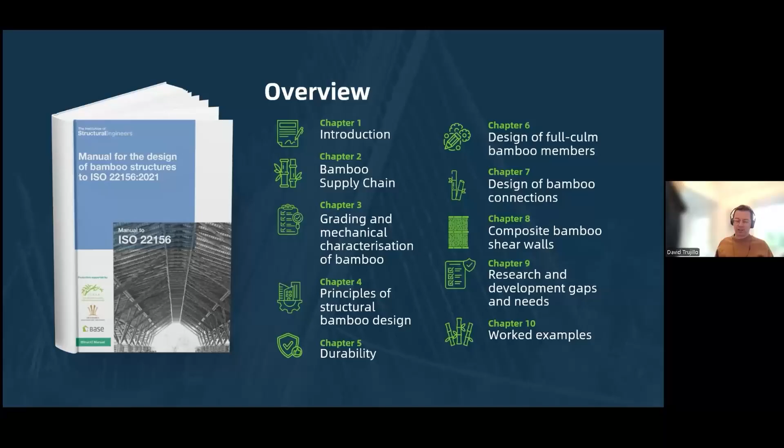And also for the academics, for example, in the room, pointing to things that we need to know more about. And finally, something that's of course essential is to point out to people how you go about designing things. The book contains detailed explanations. We try to make things very clear, so we've used tables, flowcharts and graphs to make concepts as clear as possible.

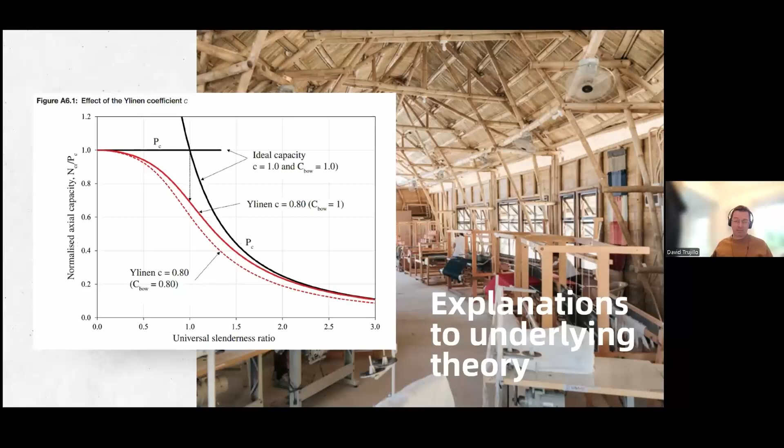We also explain the theory behind some of the things contained, not just in the manual, but in ISO 22156, because the authors were also part of the team of people who put together ISO 22156. So we know what was behind the thinking, and that's the advantage of the manual. It explains the how and the why. It contains useful guidance, and in this instance, about how to ensure that your buildings are durable.

It's one of the things I will hopefully discuss later on, because this manual is not just a...

Whoa, what happened there? We can hear you, David. It's okay. Can you see my presentation? Yeah.

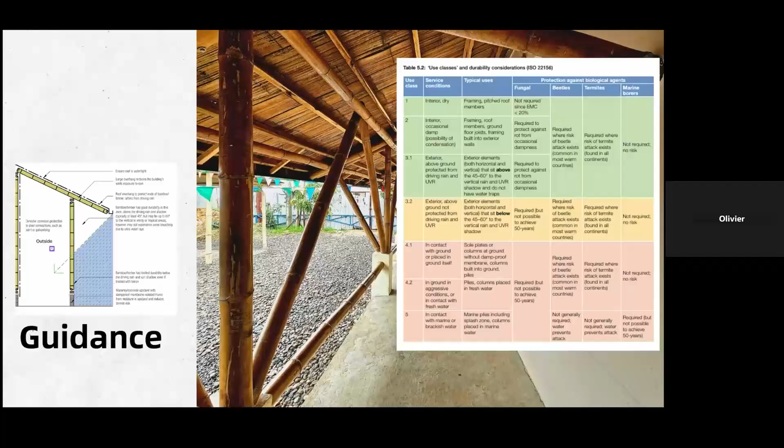It's probably the first document that contains such detailed information about durability of bamboo, how to ensure durability. It's also probably the first that contains so much information about designing composite bamboo shear walls, or bareque, for Latin Americans in the room. It's got lots of illustrations that explain how things work, and a lot of text that clarifies things. And of course, it contains worked examples, which take people through how you use both the manual and the standard.

So that's sort of the basics of what the manual now introduces. Oh, my camera's gone funny.

Yeah, I think you are blurred now. I'm blurred, I don't know. It didn't like me any longer.

I would like to start by saying that the book, though it's aimed at structural engineers, and to a certain extent it's the first of its kind aimed at structural engineers, it's also useful to architects and other professionals for other reasons. For example, it's useful to architects in chapter 4, which outlines the concept of how you design, and how to ensure design is appropriate to bamboo. And chapter 5, which talks about durability, is also very much in the realm of architects. But it also talks to other building professionals about what we engineers are after. So though it's aimed at structural engineers, it helps many people.

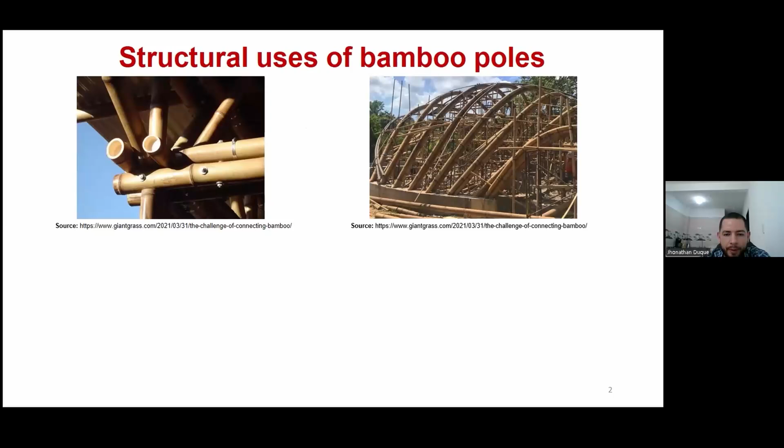First, I would like to begin by saying that bamboo is a material for everyone. Thanks to its versatility, bamboo can be used in straight column form to build large and complex structures, and also bamboo can be bent to create roof systems with great architectural beauty.

But this material can also be used to develop relatively simple structures that can represent a social solution for low income communities. Another important application, especially for people in developing countries, is housing. For example, in Colombia, the housing deficit is close to 30%. So social housing projects using bamboo can improve the quality of life of many people, many families.

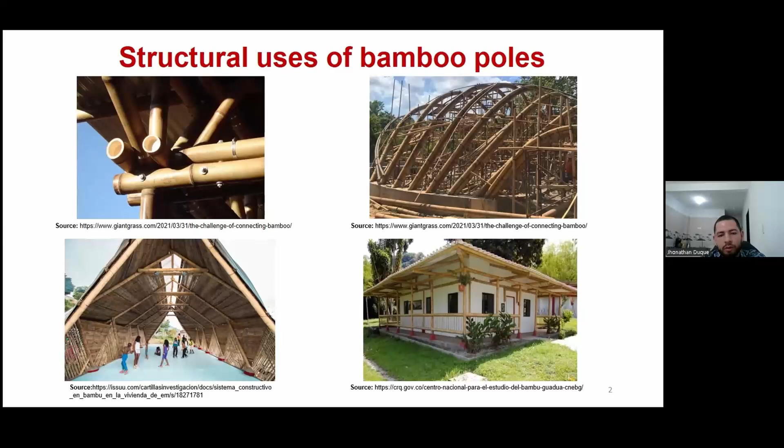The evolution of Bareque construction into the cement bamboo frame technology system has led to a structurally predictable and standardized construction method, which is now being used in projects with high social impact, for example, in the Philippines and neighboring countries.

These systems mainly use bamboo poles for the vertical studs in the walls or for roof structures, but these bamboo poles do not provide an optimal surface to execute some types of connections between elements. For example, if you want to incorporate flat wooden or fiber cement boards to complete the wall sandwich, it can be complicated with poles.

In fact, for roof structures, it's often necessary to use small wooden blocks to level the surface before installing the roof tiles. For wall construction, this challenge is addressed using crushed bamboo mats, or esterilla, and flexible metal mesh, which can adapt to the irregular surface, but this requires significant labor.

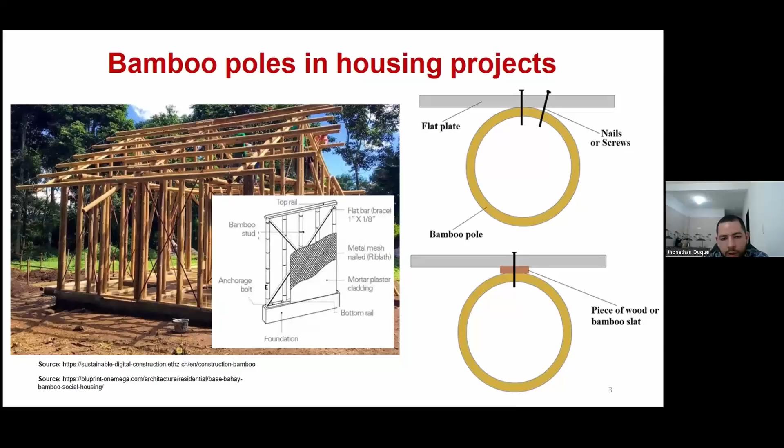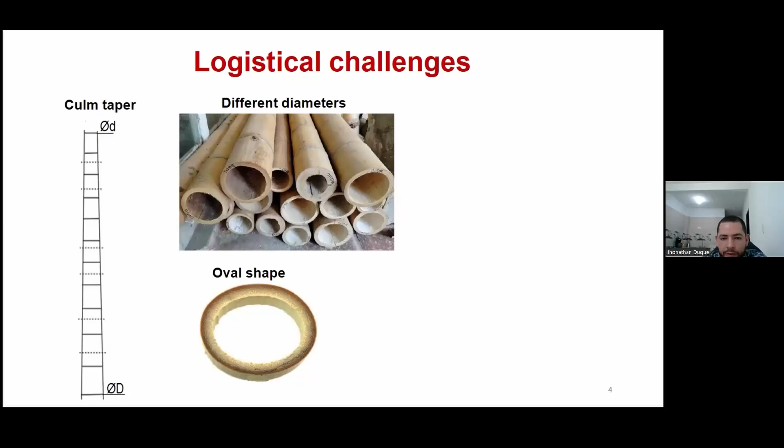All of this is due to bamboo's natural geometric irregularities, as bamboo poles can be conical, have varying diameters, or be quite oval shaped, all of which can complicate many kinds of connections. In addition, poles are prone to cracking and to volumetric changes that generate circumferential stresses and eventually longitudinal splits. All these factors often lead to a high amount of material waste.

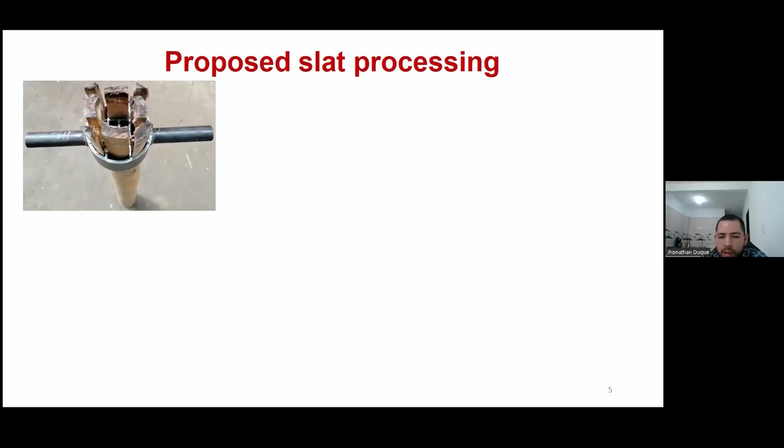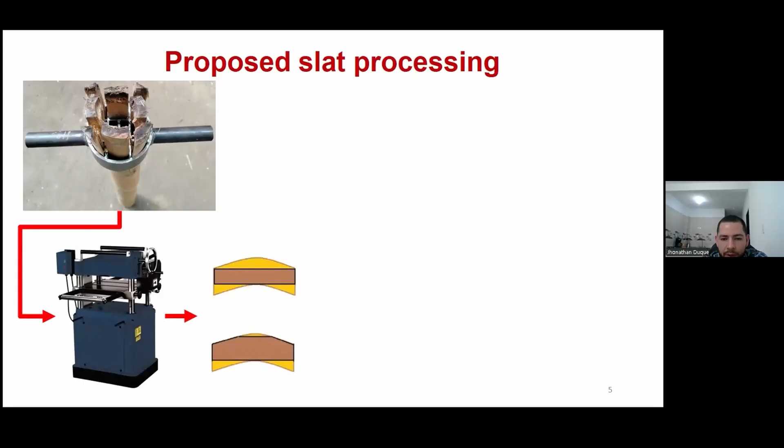For this reason, we are proposing extracting slats by longitudinal cutting of bamboo poles. This can be done manually or with simple machines, and then these slats are planed, taking care not to completely remove the outer surface, because we think this layer has the best mechanical properties.

So with this processing, the inner curvature is fully removed, and on the outside we mainly remove the protrusions near the natural nodes. This allows us to stack multiple slats together and create flatter surfaces that can facilitate the connections.

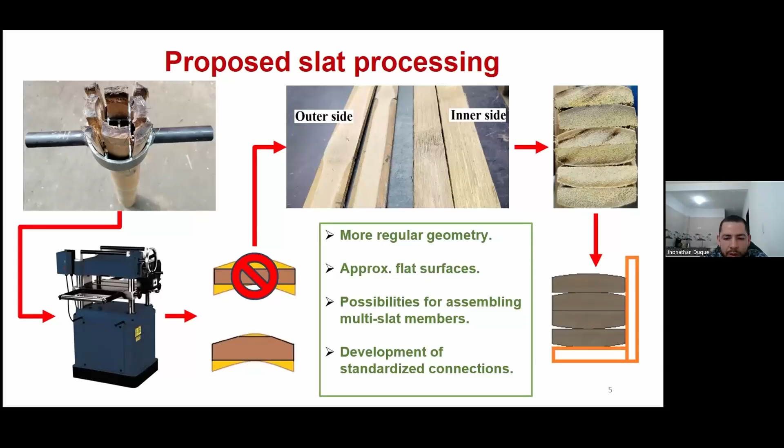Some advantages of this processing include more regular geometries, flatter connection surfaces, the possibility of assembling multi-slat members, and the development of connections with standardized dimensions.

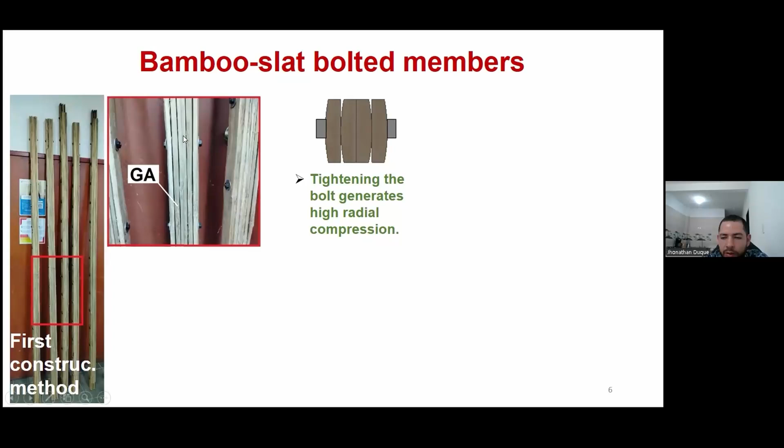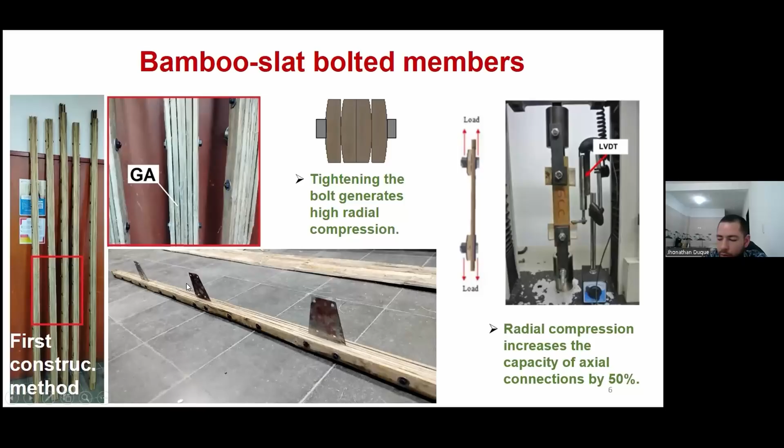With these configurations, we propose multi-slat members joined with quarter inch bolts that can be tightened strongly, generating a high radial compression through the slats. Some research has shown that this radial compression can increase the capacity of axial connections by 50%. In addition, this configuration allows thin steel gusset plates to be installed, which can connect multiple members in different directions, for example. So this can be a good idea.

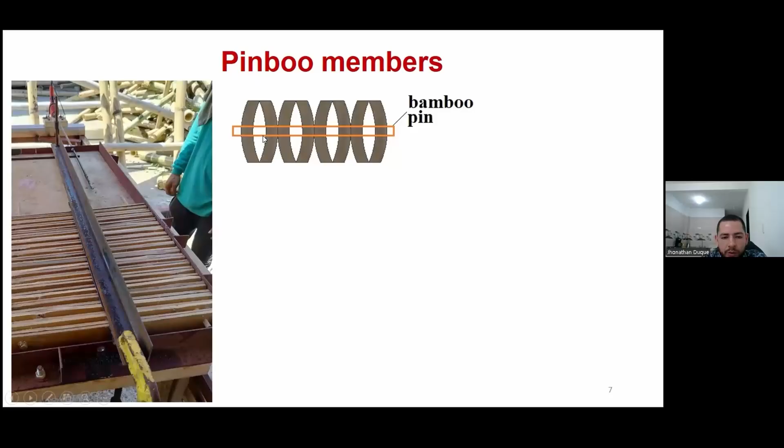Another alternative to connect slats is to join natural, unplaned slats, keeping their natural curvature. The point here is to try to reduce the labor. This can be achieved using bamboo pins to form what we call Pinboo elements, and with support from Base Bahay, we built a drilling and assembly table and a simple machine to produce pins.

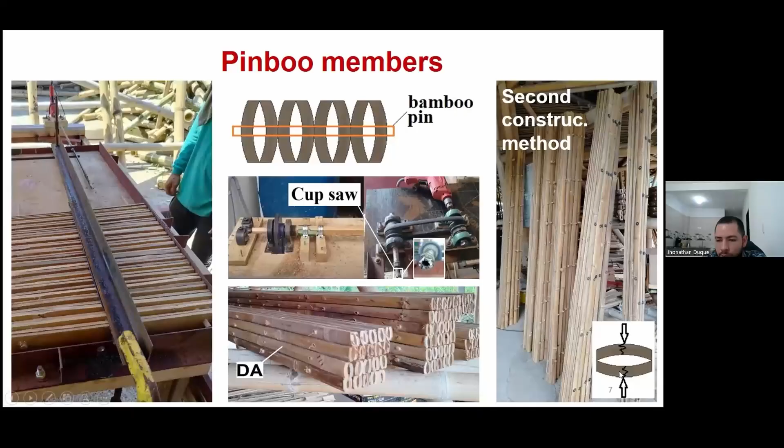Using this equipment, we built both Pinboo specimens and bolt connected specimens. Here, the bolts must be installed without preload to avoid cracking through the slats due to possible bending stresses.

We performed compression tests on these specimens to have a first characterization. Here in Colombia, we tested 1 meter members built with the first constructive method, that is, planed Guadua slats with pre-stress or preload of the bolts. In the Philippines, we tested 2.4 meter members built with the second construction method, that is, unplaned Dendrocalamus asper slats, connected with bamboo pins, and with non-preloaded bolts.

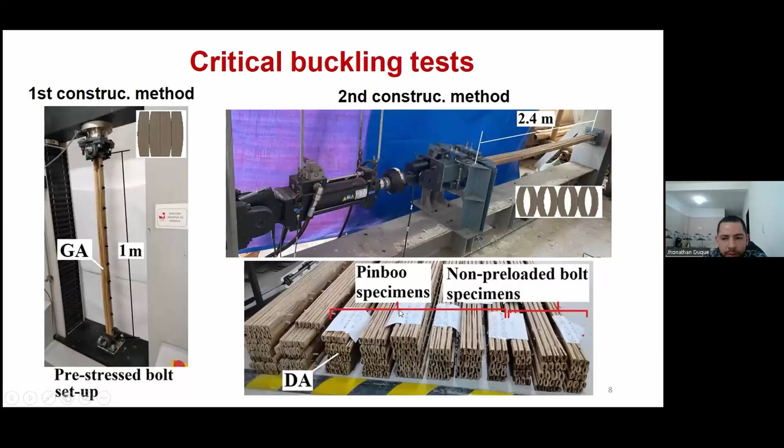We are analyzing the results through different approaches. One of these, we use a parameter that we call index ratio, which is the ratio between the effective moment of inertia to the geometric moment of inertia, where the effective inertia is obtained by rearranging or solving Euler's equation and using the critical load, the experimental load that we found from the curves.

In this graph, we see that the first construction method, these blue columns, achieve an index ratio greater than 0.8, so it's near to the optimal index ratio, that's 1. This represents a strong composite action of these elements.

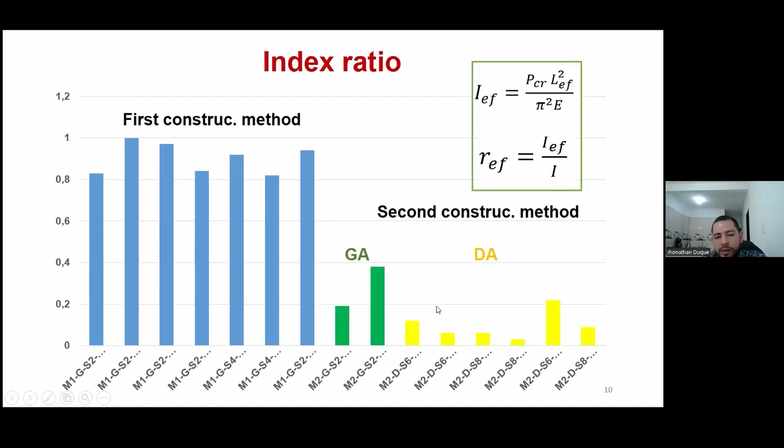In contrast, the second method shows a more limited composite action. These green columns represent some validation groups that we built with Guadua slats, but using the second constructive method, to ensure that differences were not due to bamboo species.

A second approach used some European equations to determine the imperfection factor that best fit the experimental results. Here, a factor of 0.39 provided a good fit for the first construction method, that is this orange curve.

But for the second method, this approach was not valid because the results were too small, we can say that.

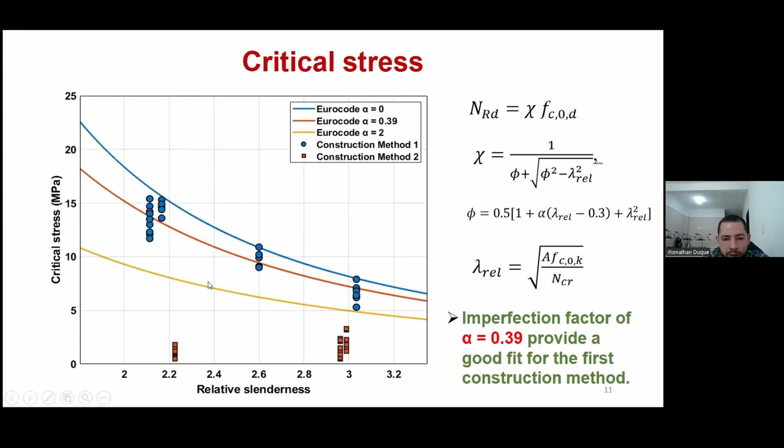We also use finite element models to compare experimental and analytical results from the index ratio approach, and we found good agreement with the numerical result, as you can see here. It's really near.

So then we explore different joint configurations for slat members. We first propose the connection between 2 slats using thin steel clamps and a couple of 1/4-inch bolts, and also we propose multi-slat connections using bamboo pins.

First, in this proposal, we try to do a kind of finger joint or finger configuration with these slats. So we complete the joint with bamboo pins, with wooden blocks, with a thin metal sheet and some screws.

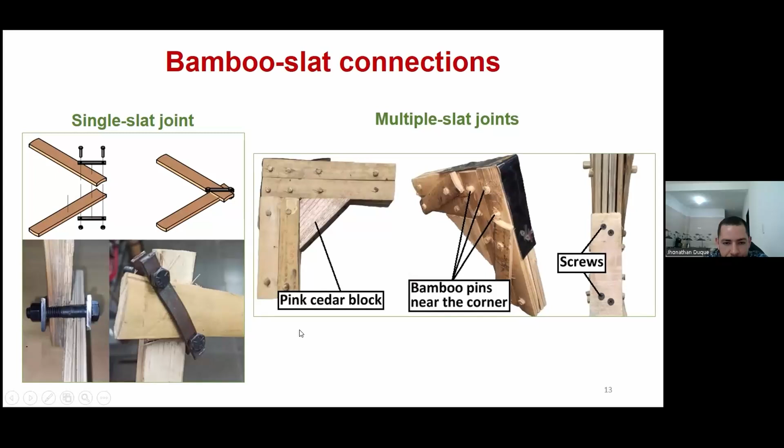And we do a first characterization under monotonic loading of this kind of connection. For example, for the 2-slat connection, we obtain a maximum moment of 0.19 kilonewton meter and a rotational stiffness of 3.8 kilonewton meter per radian, and ductility of 17.5.

That was really high. For the multi-slat connection, the maximum moment and stiffness increased by 7 and 1.8 times respectively compared with the 2-slat connection, while the ductility decreased by about 7 times, because the holes near the connection zone can generate stress concentration, becoming more brittle the joints.

We then propose a simpler and easier to assemble connection consisting of 2 multi-slat members joined with a finger configuration, as you can see here, and that is confined with 2 millimeter thick steel gusset plates, tightened with 5/16-inch bolts.

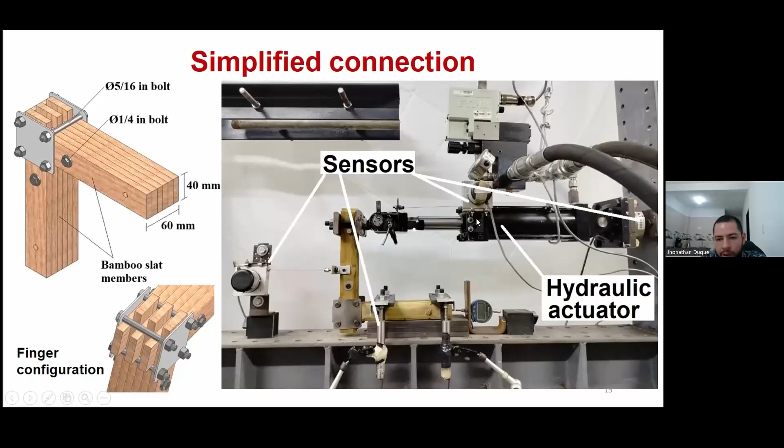Based on this monotonic experimental results, we developed a 3-linear analytical model that uses the slat dimension and mechanical property to predict the monotonic behavior, represented by these blue and green curves.

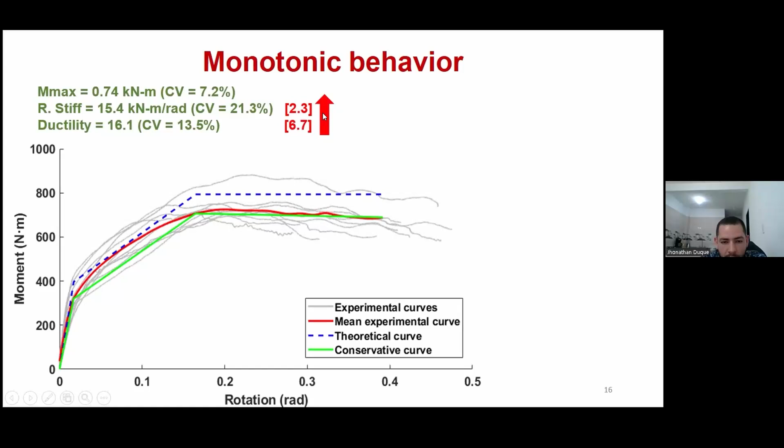We found significant improvement in rotational stiffness, 2.3 times, and in ductility, 6.7 times higher compared with the multi-slat connection with bamboo pins. And using the beamline methodology that is usually used for moment connections, we could classify this joint as partially restrained.

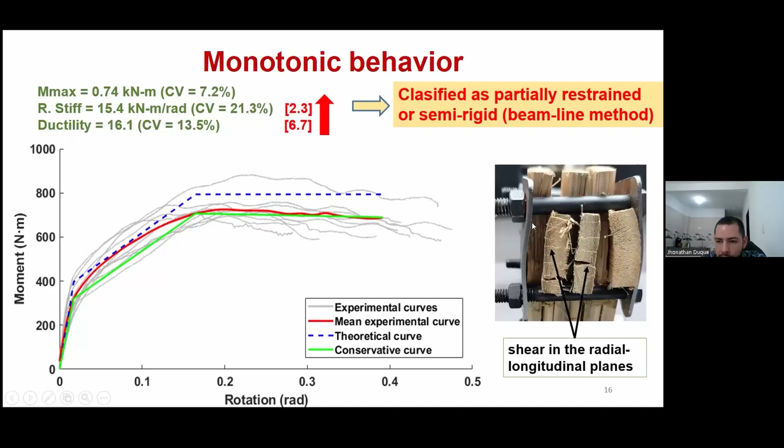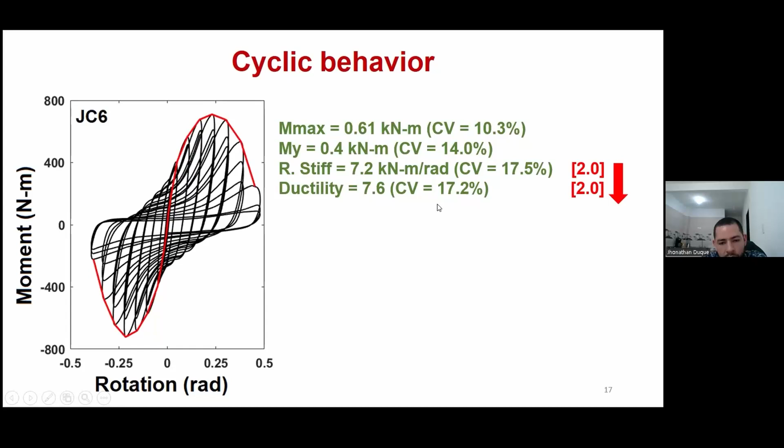Here's one of the cycle curves with 30 cycles. The red line shows the backbone curve from which these performance parameters were extracted. It's important to know that rotational stiffness and ductility in the cyclic test were about half of those found in the monotonic test. This may be due to loss of friction and small relative movement that can be caused by load reversals.

In several specimens, we obtain the complete or total fracture of the slats passing through the finger joint zone, mainly due to the longitudinal tension from the bending that is supported by these slat members.

The goal of all this is to be able to build this kind of frames or skeleton using these multi-slat members in the vertical stud and horizontal joist, and these elements will be connected with moment resistant joints. So the connection I was showing now will be used at the frame corners.

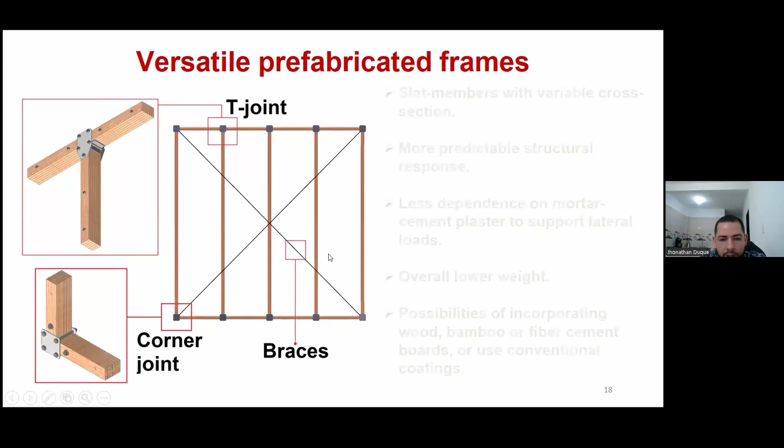So we also need to develop the joints for intermediate nodes, and we plan to test different kinds of bracing configurations and different cladding or coatings for this frame. So in this proposal, the frame thickness can vary depending on the number of slats per member.

We think the structural behavior could be highly predictable, and the system could rely less on cement mortar plasters to resist lateral loads, making it lighter. In addition, there's a potential to incorporate wood, bamboo, or fiber cement boards, or to use conventional cement plaster.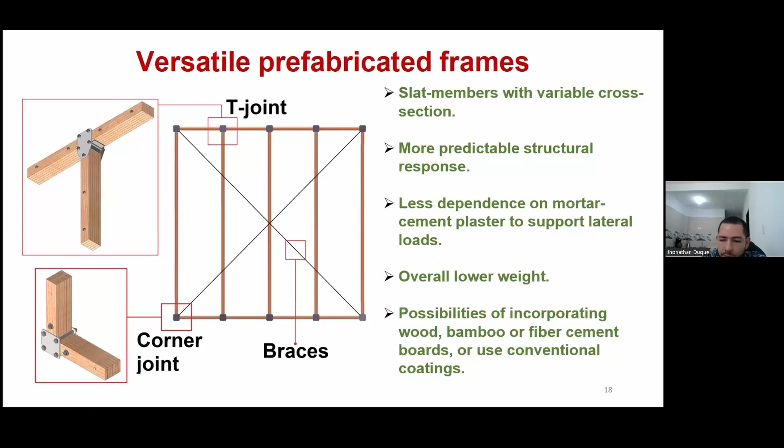Okay, regarding the T-joints, we have made some progress. In the first phase, we propose several configurations.

Here I'm presenting three. In the first proposal, the horizontal members are connected to the stud vertical member on both sides using 1/8-inch thick steel brackets with 1/4-inch bolts.

In the second proposal, the vertical stud rests on top of the horizontal member, and that is confined by using a couple of gusset plates that are tightened with bolts.

For the third proposal, we use a gusset plate that is installed in the middle plane of the slats of both horizontal and vertical member.

In this case, the gusset is connected to the horizontal member with bolts, so we have to drill holes on the slats here, and it's connected to the column elements by using a couple of clamps without drilling into the slats.

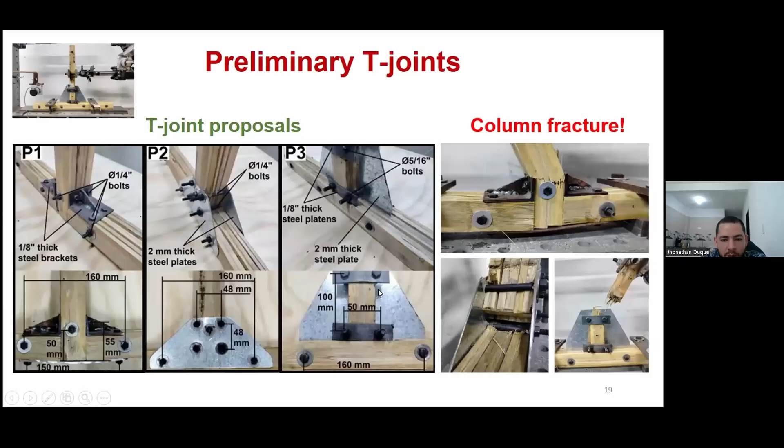So we conducted a second phase of experiments with geometric modification to this design. We changed the aspect ratio of these plates. This distance was 160 millimeters, and it was reduced to 120 millimeters.

And we tested here three plate thicknesses: 0.8 millimeters, 1.5 millimeters, and 2 millimeters.

Okay, for the thinner plates, failures occur in the connection steel elements, while the bamboo remains intact. For example, at 0.8 millimeters, the failure mode was local buckling and shear tearing due to the bolt interaction here.

At 1.5 millimeters, we observe only shear tearing due to the bolt interaction.

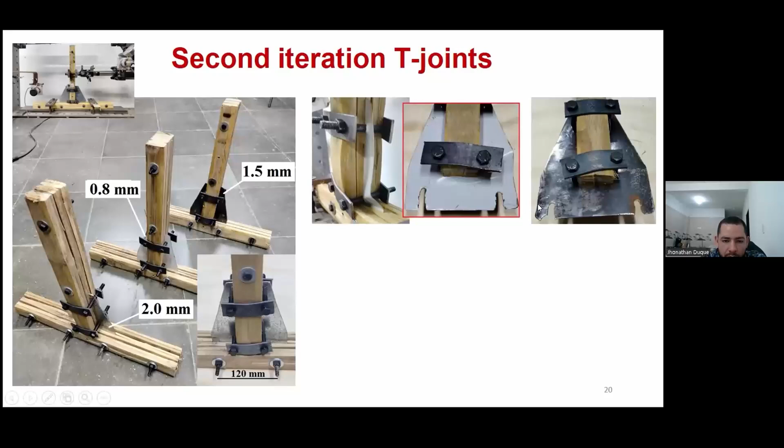And finally, for the 2 millimeter thickness, we observe a good failure. You can say that the horizontal bamboo member failed, and some steel elements were plastically deformed, and I say that was a good failure mode because it was a ductile failure, so we estimate a ductility of 4.3.

That is a good ductility, and based on these results, we select this connection for full monotonic and cyclic characterization, and that will be the next stage.

Okay, so these are some preliminary conclusions, but before that, I would like to show you this first frame or skeleton that I'm finishing. The idea with this specimen is to test under monotonic or cyclic protocols, first without bracing, to test the work of the moment resistant joints that we are using here.

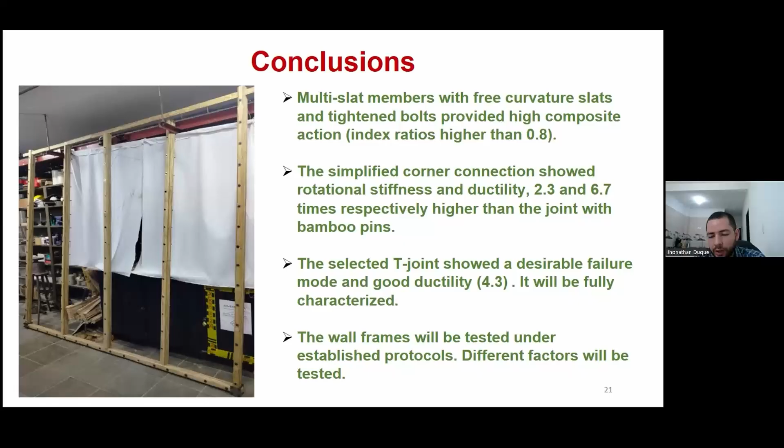And the wall frames will be tested under established protocols with different factors that I mentioned.

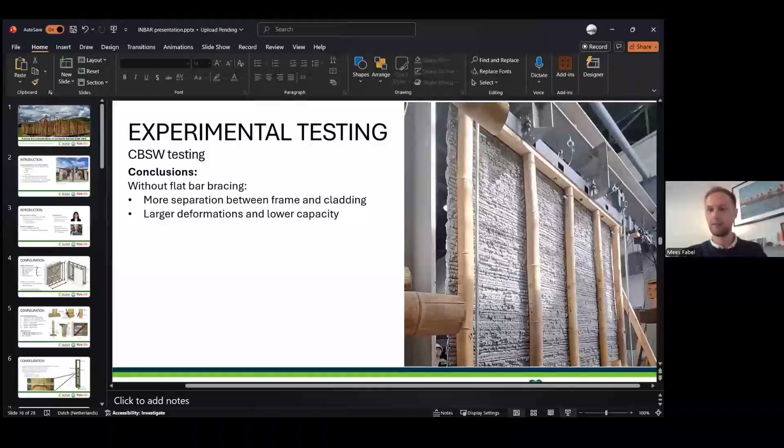So how are you, Mees? Nice to see you. Yeah, nice to see you as well, Luis. It's been a long time. First of all, thank you for the opportunity to share the work that we've been doing. Thank you also, Jhonathan, for the nice presentation. I will go and share my presentation. Let's see. All right, I think we go here. Is it visible? Yeah, but not just there. Okay, now it's perfect.

All right, great. So good evening everyone in the Philippines, and good day to the rest of the world, I guess. I'm going to share the work that I've been doing at Base Bahay, which focuses on composite bamboo shear walls, which are also included in the new book. Yeah, great to see.

First, I'll tell you something about Base. Base Bahay is a company that researches the use of bamboo structures, and one of their main systems applied in housing is composite bamboo shear walls. They apply it in projects in the Philippines, but also Nepal, India, and Sri Lanka. In the Philippines, they're using a local species called Bambusa blumeana, or Kawayan tinik in Tagalog. The nice thing about this type of structure is that it has a good ductility ratio, so it's very good for use in seismic areas.

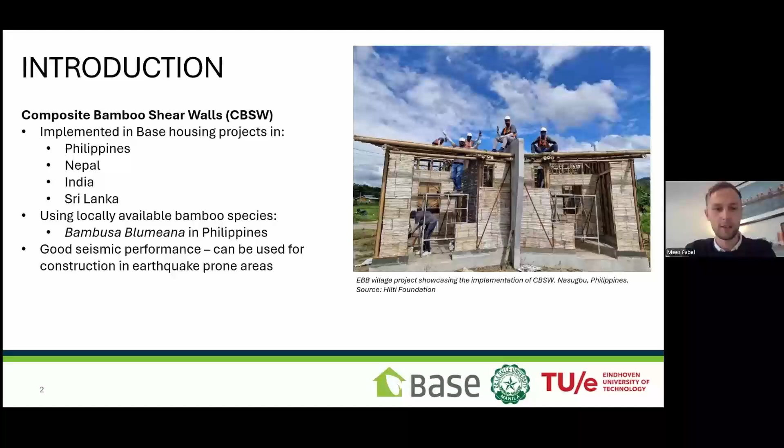So let's dive into it. First, I will explain a little bit what is the layout of a composite bamboo shear wall. As you can see, it's consisting of a frame and a cladding, and the frame and the cladding are connected by fasteners. So those three elements are basically what make up the shear wall.

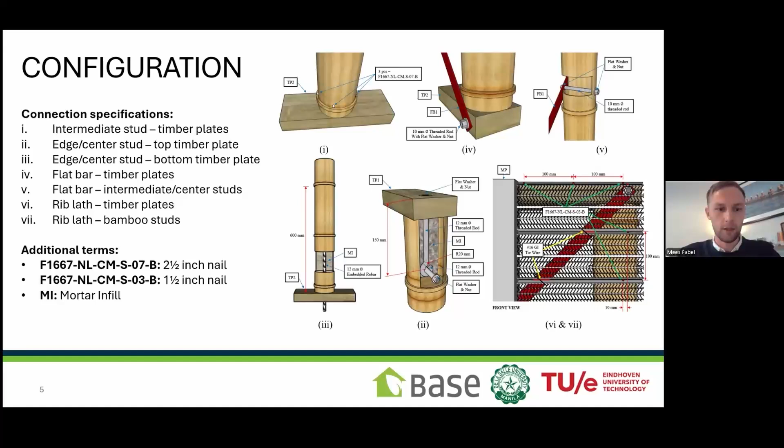For the connections, this is a bit of an overview for the nailed connections, which are a big aspect of this wall system. What you can see here is a section of one bamboo stud, and for the connection with the cladding, the nails are actually placed through the wall of the bamboo culm. Because of that, you get a different interaction for places where mortar infill is applied or where there is no mortar infill applied. This is a very important point for the capacity of the total shear wall, which we will get to in a bit.

Also, you can see here again that for a proper connection, we use bamboo that has nodes very close to the edge. Then if we consider all the fasteners, so the nails and the bolts, when bracing is applied, we can schematically lay them out like this, so that you get an overview of what type of embedment or what type of connection you have in which position on the frame.

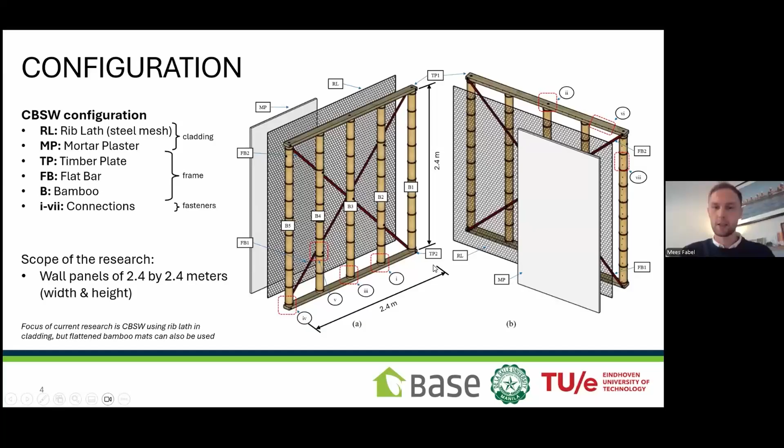So I will just quickly go back to this slide. For the figure that I just showed you, the frame is actually the same shape as the layout, and that's because the fasteners are positioned along this frame. What's interesting to see here is that there's mortar infill applied at the edge studs at the top and at the bottom, and you have some bolts which are along the flat bar bracing.

So with these fastener types, we have a very good representation of our frame, of our connections. And then we can use this to, for example, model the shear wall.

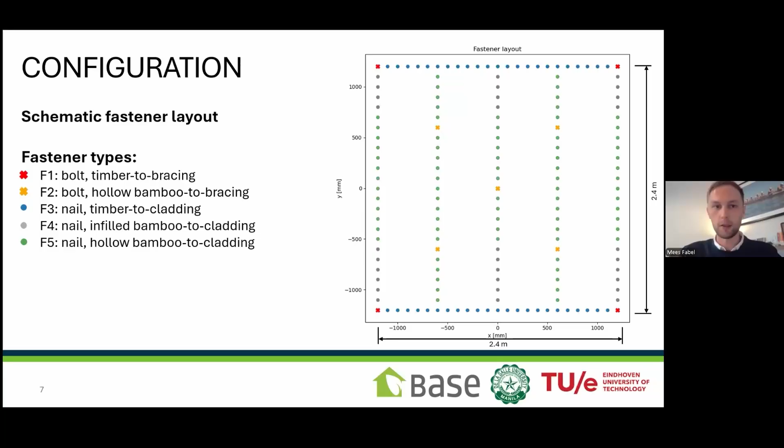But first, I want to show you the testing that we did. Here is an overview of all the testing. We wanted to be able to make a prediction of how the shear wall behaves under loading.

For that, it's necessary to look at the single connections used in the shear wall. So we did some partial testing: single fastener tests. And then after that, we also did some full shear wall testing.

We tested only the bamboo connections because for the timber connections, we assume to be able to use the Eurocode, since it's already quite well documented.

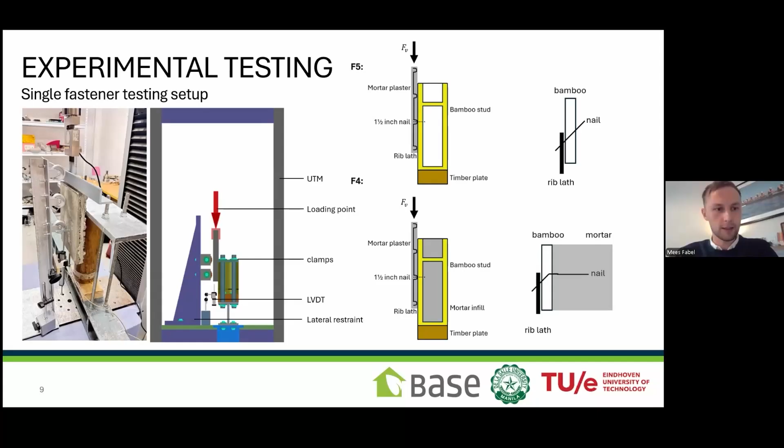Something that happened in all of the testing: after a certain displacement, the rib lath also loses its capacity. It basically ruptures, and then there's a total separation between the cladding and the frame. These failure modes are very interesting to take with us to the actual full-scale testing.

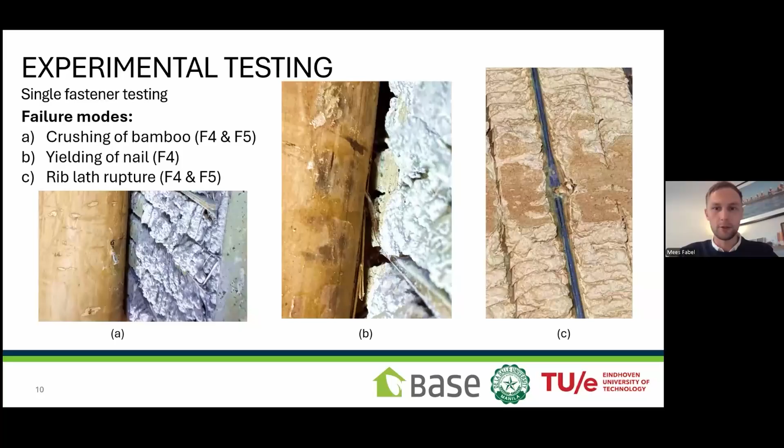Here are the same conclusions listed again. So with this knowledge, we can move on to the full-scale testing.

And that's where the single fasteners come in, because shear failure is then only caused by the connection between the frame and the cladding, which is the fasteners.

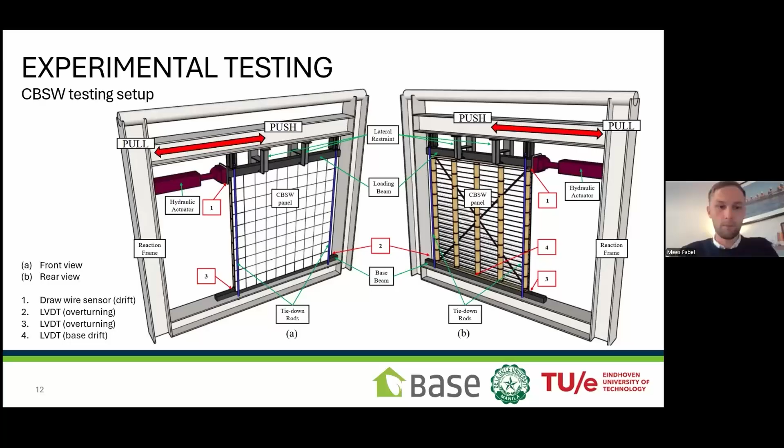We actually used the data from the monotonic test, using the failure displacement to cater the cyclic testing. So for cyclic testing, you control the displacement and increase it until this failure displacement retrieved from monotonic testing.

So with this, we started testing. I wanted to share with you some of the videos that we have. First, I'll show a monotonic test, and then after that, I will show the cyclic test.

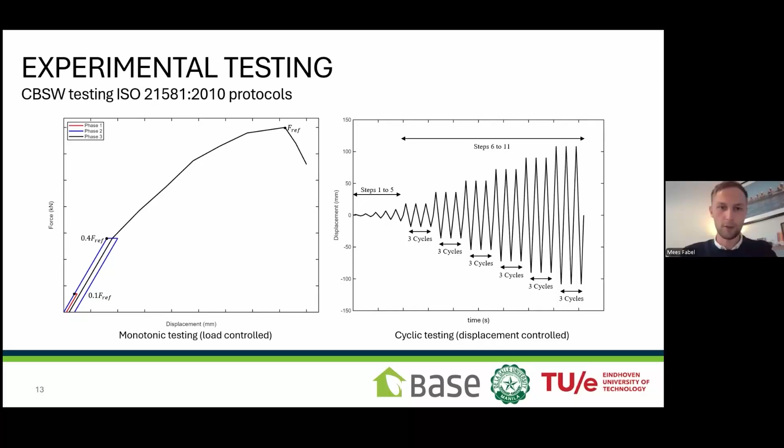For the cyclic test, we did them at a very high pace, so it's also very nice to hear the sounds that come along with it. I hope you can hear it from the presentation. First, here's the monotonic test.

What's interesting to see is that if you look closely at the cladding, it is actually rotating a little bit. I'll show it again. What you can see is that at the top left edge, there's a small gap between the cladding and the frame, and at the top right edge, it has actually gone over the frame. This is interesting to see.

It's actually one of the things that we can also use for the modeling of the shear wall, so I will get to that in a little bit. Now, if we take a look at the cyclic loading, I have filmed this from the other side, so you will get a different view.

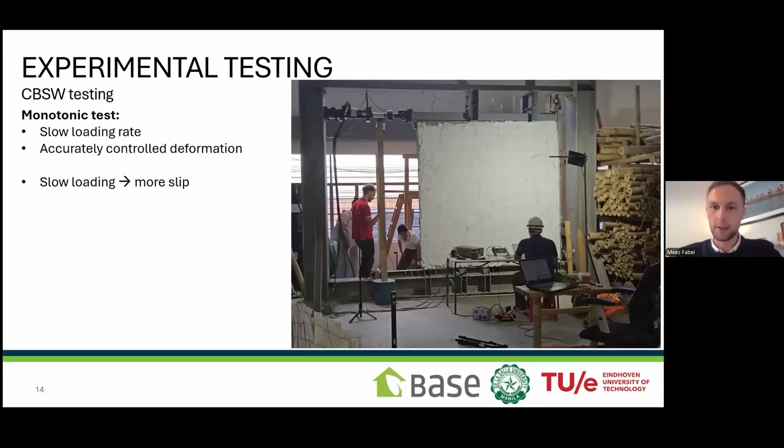It's also interesting to see what's happening to the frame. So here you can see it, and you can also definitely hear all the creaking noises. So it's really the bamboo that's working.

Now what's interesting here is that you can really see that the cladding is rotating. So instead of having the mortar or the cladding itself resist all the loads, it's actually just acting as one solid plate element. And the failure of the shear wall is actually only caused by the fasteners. Then it's interesting to see that in the corners, you will have the most displacement.

Now this brings us to the point of the bracing. We wanted to test the shear wall not only with the flat bar bracing applied, but also without. It's interesting to see the difference, because initially my thought was that the bracing would actually provide a lot of the shear capacity. But it turns out it's actually not so necessary for shear capacity. It's more necessary, for example, for out of plane effects.

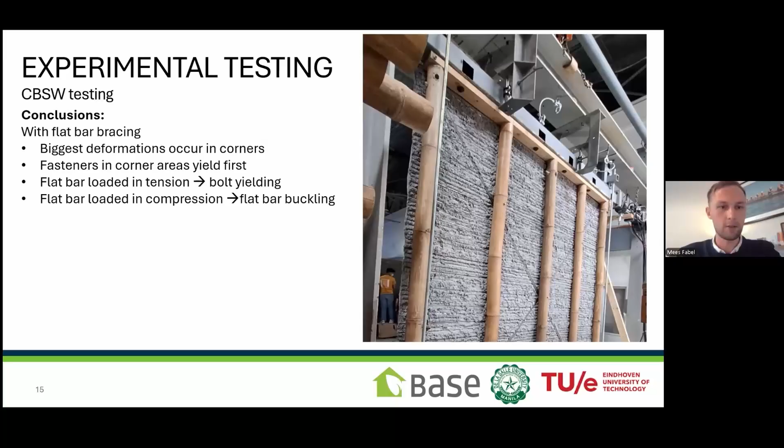So in the next video that I'll show, you will see a shear wall without the flat bar bracing applied. And then what you can see is separation between the frame and the cladding.

So yeah, it's really interesting to see what kind of unexpected effects some of the elements used in the composite bamboo shear wall have. So let's move on to some failure modes.

The most obvious one is, of course, the yielding of the fasteners, so the yielding of the nails. Also one that is caused by the corners being pushed into the testing frame - it's crushing of mortar. Then separation of frame and cladding, which we mostly saw for the test that we did without flat bar bracing. And where we did apply the flat bar, you could also see some buckling of the flat bar when it's loaded in compression.

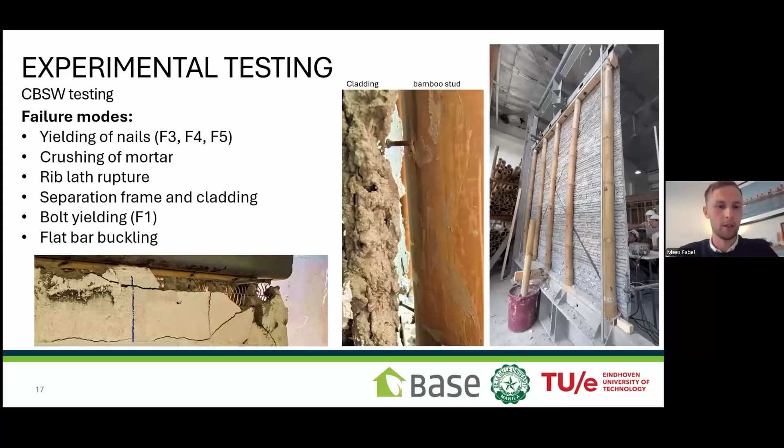So with that in mind, I would like to move on to the theoretical part. What I wanted to do is make a model that can be used to predict the shear wall behavior. The goal of this is to accurately describe the behavior of the composite bamboo shear wall. Then, for example, it can be used to optimize the structure or to find better alternatives for certain types of fasteners used.

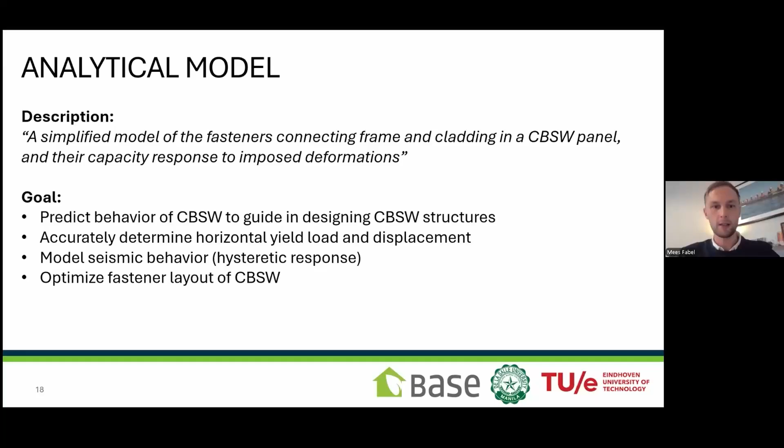So this part is quite theoretical, so maybe I will just briefly explain it. This is actually the way that it's set up. As you could see from the videos, when a displacement or a force is introduced to the composite bamboo shear wall, two things will happen. One is that the frame will start to deform horizontally, and only horizontally. And the cladding will start to rotate around its center of gravity, which is also the center of the frame. That yields the movement that you can see on the right side of this graphic.

And what's interesting about this is that you can actually use this to calculate all the distances between the frame and the cladding in each position. This is actually what we use, because all the nails in the composite bamboo shear wall have a determined position, which is also what I showed in the schematic overview of all the fasteners used. So when you know their position and the rotation angle caused by the horizontal force or by the displacement, then you can calculate the displacement of each individual nail. This is actually what you can use to calculate or predict the capacity of the shear wall.

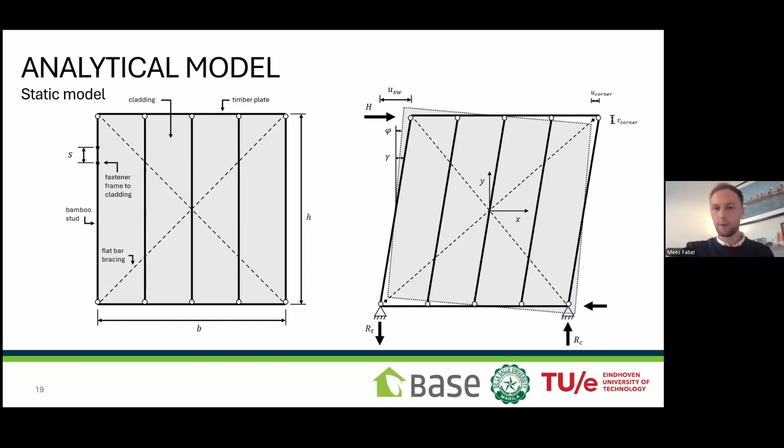This is something I'll skip for now. It's derived from a very interesting paper written by Källsner and Girhammar. They applied the same theory to timber framing. What's important from their theory is that you can define a formula for the rotation angles. So, as shown here, you have an angle gamma of the frame, and an angle phi of the cladding.

Those angles are actually related to the stiffness of all these fasteners used in the shear wall. This is the relation that you have, and the basis of the relation is the distance from each single fastener to the center of the shear wall, in the X direction and in the Y direction separately. So if you know that distance, and you know the stiffness of each of the single fasteners in your shear wall, then you can already define your angle gamma or your angle phi.

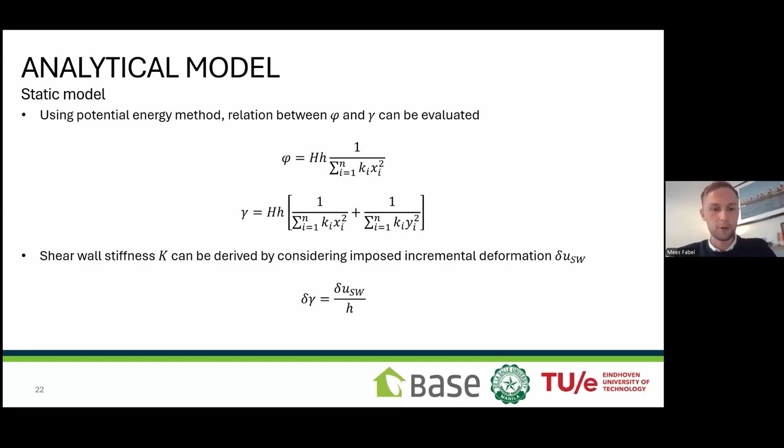And using this knowledge, you can also find the capacity or the stiffness of the shear wall. This is really interesting, and it's something I have now used to make a model. I'll skip the derivation for now. I just wanted to share with you what's the theory behind it, and what you can use it for.

When you know the stiffness of the entire shear wall, you can integrate that over the displacement of the entire shear wall to find a force. That force is actually the horizontal capacity that you then have. So it's really interesting to see that you can use the knowledge of each individual fastener to derive a total horizontal capacity.

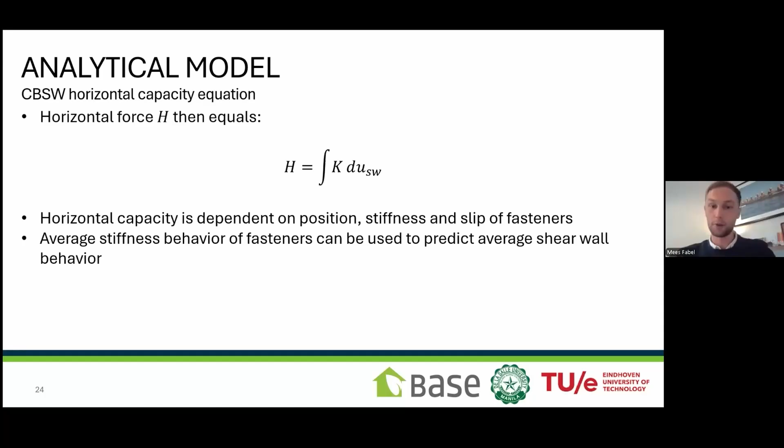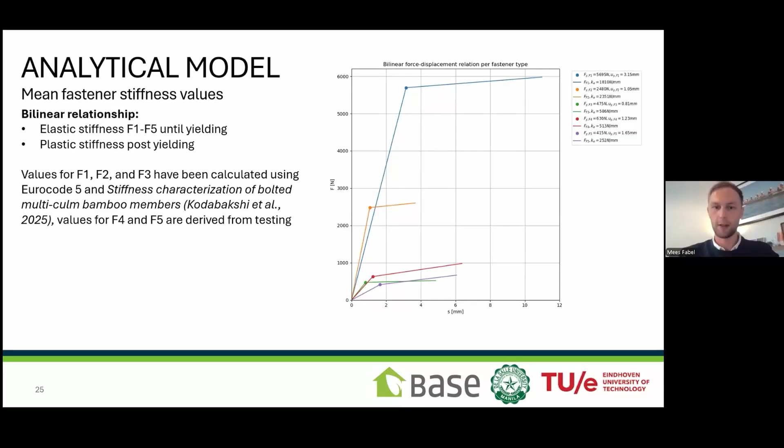That brings us to the conclusion a bit, because now we have something we can use to determine where we could change some of the geometry, or where we can change some of the fastener types used to improve the capacity of the system. So that's what I wanted to share with you today.

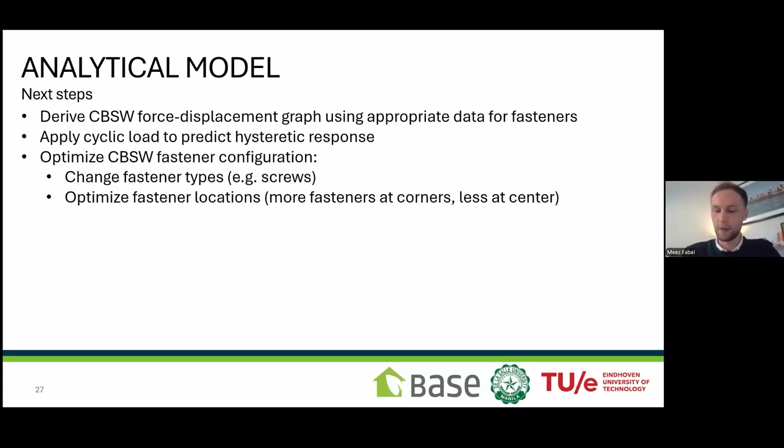Another thing I still want to improve in the model is to see what's the response for cyclic loading. And then I want to still apply some of this knowledge to find a real optimization shape or fastener type to use in the composite bamboo shear wall.

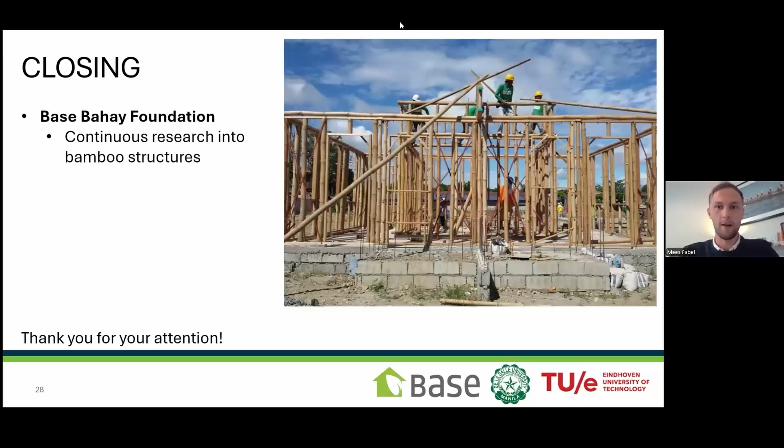Thank you very much, Mees. Really nice to see your work already in progress. I think it's not yet finished, you're still dealing with your thesis. But it was for us also a pleasure to have you in the lab. We have a very interesting time working together, sharing ideas.

I remember our conversations in the lab, trying to figure out the resistance of the panels, where they are going to fail. We had this, I will not say game, but it's like trying to guess the resistance.

So we always try to find who is going to be the nearest, and it was quite fun.

Aside from the nice experience in the laboratory, the work you are doing is really interesting and an important part of the development of this technology. I think 25 years ago, when the Colombian Seismic Association did the first tests with a big number of samples in Colombia for the building code, that was a good achievement, but a lot of questions were still unanswered. I think with this work, you are trying to answer many of those questions and go to the next step, the analytical models and the prediction of the behavior of these panels. This will bring us to a more interesting place. Congratulations for the work.

First of all, Base Bahay Foundation was established to provide alternative building technology to enable affordable, dignified living to people in the Philippines. Now we are expanding gradually throughout Southeast Asia, but originally it was primarily for the Philippines. We operate through three different arms. The first one we call Base Innovates, where we lead research and development of bamboo-based technologies. The second arm, which we call Base Builds, is where we work with architects, structural engineers, and construction workers to transfer the technical know-how and enable you to build with bamboo.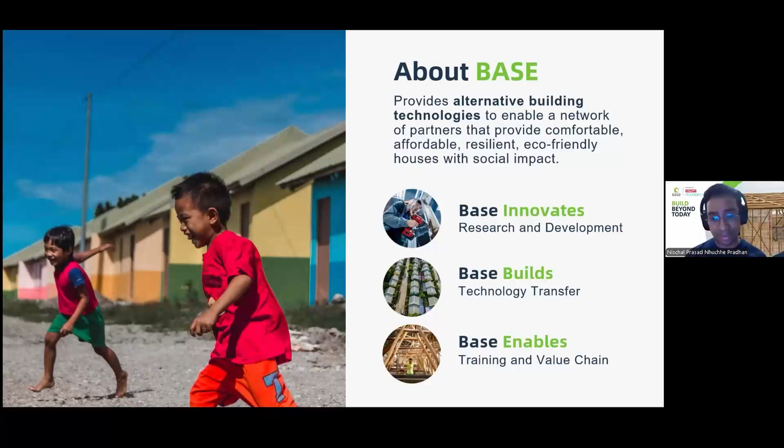And the third one, which we call Base Enables, deals with training and the value chain, where we work with treatment centers and bamboo harvesters so that you guys can get the high quality bamboo poles you would need for building bamboo structures.

Our core technology, we call it cement bamboo frame technology, has quite a few interesting features. They are a permanent housing solution with a minimum lifespan of 50 years. They are engineered structures designed to resist typhoons and earthquakes as per local building codes. Since we use only chemically treated bamboo, they have insect and fungal resistance, and certain wall specifications have a fire rating of up to 120 minutes.

And if you compare this technology with our closest alternative or competitor in the market, we are generally 20 to 30% lower in cost for the same floor area.

These are some of the houses that we've built over the years. You can see single-story duplex houses, two-story houses, and we can even build houses that are designed to respect the culture of the Philippines. We have two-story single-detached houses as well, and this is a middle-class house that one of our partners built.

He has set up a treatment facility called Kawain Collective, and you can actually work with him and also buy bamboo houses like this from him.

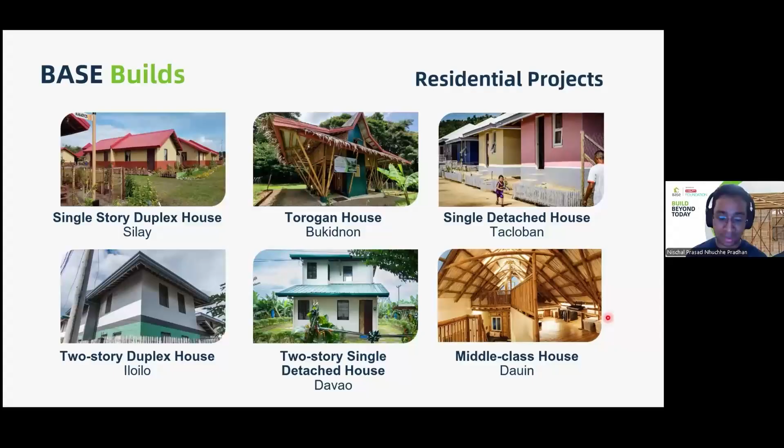This is how the houses look from the inside. You can see all the bamboo structural systems clearly visible, and we proudly show bamboo from the inside, there's nothing to hide. But there are certain cases, for example in bathrooms and kitchens, where we don't want the bamboo exposed, so we have cladding there so you don't see the bamboo.

And if you're working with two-story structures, we do have bamboo-based staircases as well, as you can see here. This is how all of our houses look in the field.

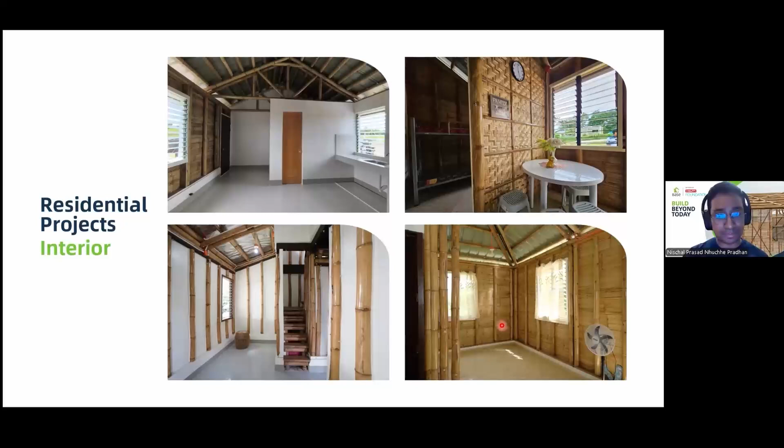You can even use the technology to build other non-residential structures, for example community centers, school buildings, office buildings, even industrial buildings such as weaving centers and food processing centers.

Now, you have to realize that when you work with bamboo, unlike conventional materials, there's no existing knowledge base to work with, which means we have to create our own knowledge to support our work. As a result, we've established a laboratory here in the Philippines, which we call the Base Innovation Center, where we do fundamental and applied research to develop all the technical know-how to design and build our structures.

So all the results of our research and development, we use to also write building codes and standards. We've actually written building codes for the Philippines, updated building codes for Colombia and Nepal, and next year we're going to work with Fiji and Peru to help them develop their building codes as well.

The same technical know-how we also transfer into training and learning so that we can pass this knowledge to you guys, and you can use it to design your own bamboo structures. In recent years, we've started exporting this technical know-how to our partners across Asia, for example in Nepal, India, Sri Lanka, and Bangladesh.

I want to talk a little bit about the impact of all the students who have joined. Up to today, we've had about 300 plus local and international interns who have worked on over 91 student research theses, and collectively we've published 12 journals and conference papers.

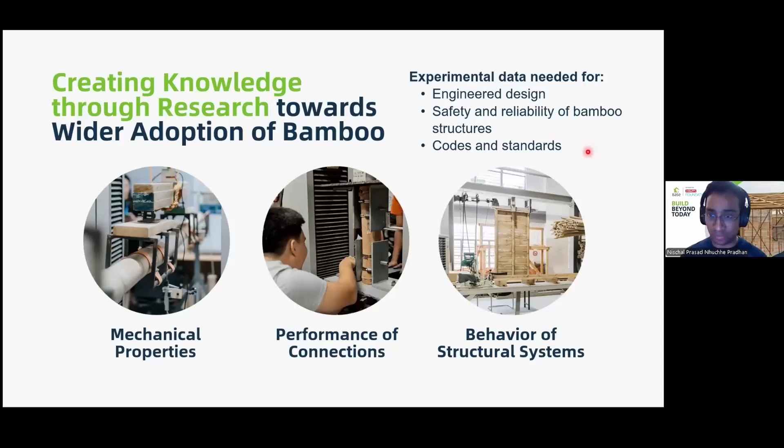Within Base Innovation Center, we are primarily focused on 3 different types of research. We are working on mechanical properties, performance of connections, and trying to understand the behavior of structural systems. You saw in the presentation how we are trying to understand the behavior of cement bamboo frame technology walls. Our primary goal is to contribute experimental data needed for engineering design and ensure safety and reliability of bamboo structures, and to feed the development of codes and standards throughout the world.

Now I will start moving towards the topic I would like to talk about in more detail, and that is mechanical characterization.

If you think about this globally, you have over 1,600 bamboo species available. Out of those, maybe about 100 species are used for structural use, and out of those 100 species, less than 20 of these species are characterized. Out of those 20, Base has been working to characterize about 7 of these species.

You can see some of the species that we are nearing completion on: Bambusa blumeana, Dendrocalamus asper, Guadua, Bambusa vulgaris, and Bambusa merilliana. Out of these species, Dendrocalamus asper, Guadua, and Bambusa vulgaris we consider as global species. So if you're working in any part of the world and would want data on these species, please let me know. I can share this data with you so you can do structural design and build structures out of these species.

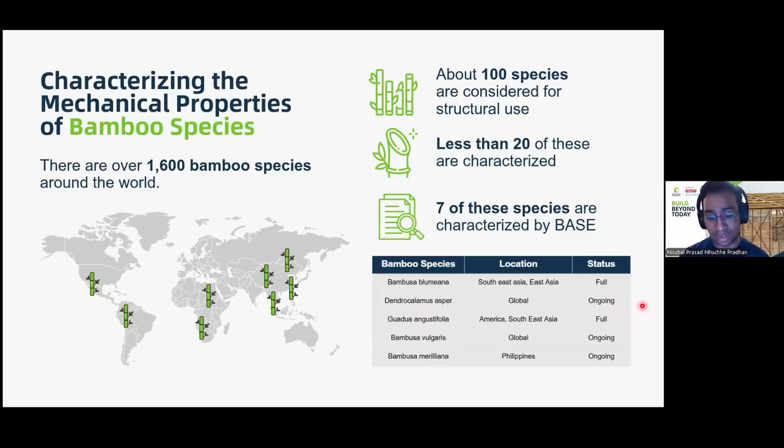In terms of characterization, to do a full, complete mechanical characterization of a species, you need to do 6 different types of tests as specified in ISO 22157. This includes compression parallel, shear parallel, tension perpendicular, bending perpendicular, and bending parallel. These are 6 different kinds of rudimentary tests.

And you need to do about 30 tests. Actually, ISO says you need to do 30 tests minimum. But when we started doing these tests in our lab, we realized very quickly that 30 tests is not enough. The coefficient of variation, or the natural variability of bamboo in the form of round pole, is so large that 30 tests are not enough to capture the full variability. So what we did is we are now doing 100 samples minimum for each species. So to fully characterize one species, we are doing about 800 tests.

So compression, 100 for compression, shear. For tension, we have to do 300, and from the 300 we take the minimum 100, and so on. So for tension, bending, and bending parallel, we take 100 each. So we have to do at least 800 tests in order to fully characterize the mechanical properties of the species.

Here's an example of bending strength parallel to fibers. You can see how the distribution is observed, and the strength varies between 40 to 140 megapascals. Whenever we are doing design, we never design with the average. We have to look for a lower bound, which we call the 5th percentile value. You can see that it's about 57.03 for this data.

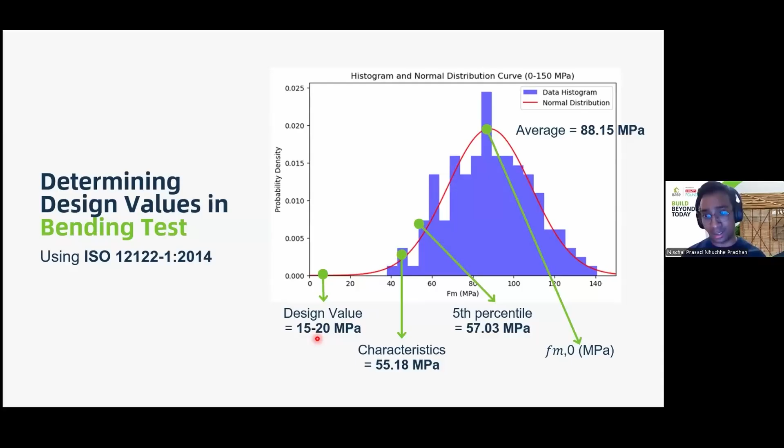On top of this, you multiply with further modification factors of safety, and you get a final design value of 15 to 20 megapascals. So any design value you use is a small value, and there is no specimen in the laboratory where you will ever get a value that small. You have to bear in mind the amount of conservativeness present in this current design approach.

You have to do this for all 6 different properties, and this is the table you get when you do a full characterization. You're looking for a range of data with a range of characteristic values, and for some properties you also work with mean. So we also produce mean values, for example, for Young's modulus, density, and so on.

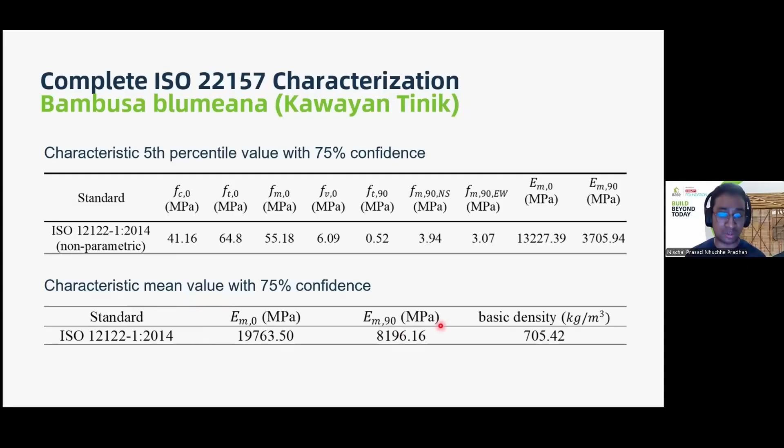Here's the issue: if I want to characterize an entire species, I have to do 800 tests. If I characterize 5 species, that's 800 times 5, which would be 4,000 tests. You can see how crazy the numbers get. If I want to characterize all 100 species, it's going to be a super large number. I'd be set for the rest of my career, even my children's and grandchildren's career.

So what I want to do is avoid doing all these kinds of tests, and I want to figure out if there's a way to cheat the system. With one of our students in our laboratory, we found a promising method, and I'm going to show you how we will now do the characterization.

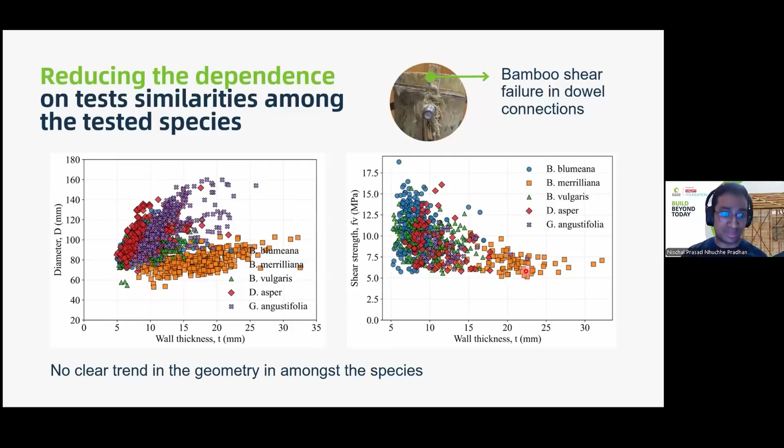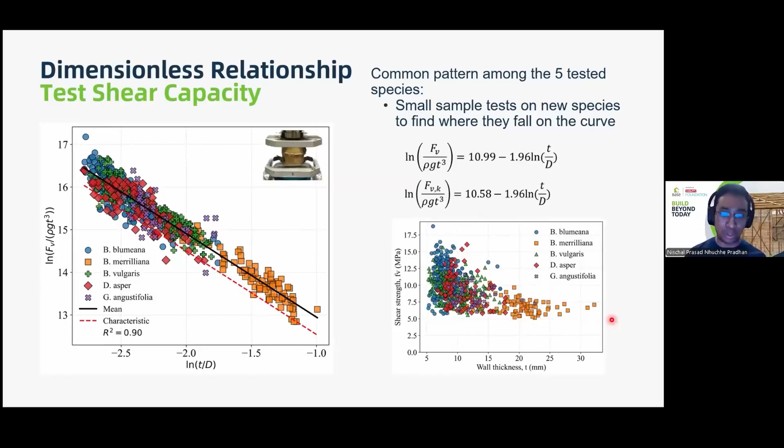So you can clearly see a very clear trend across species that you were not able to see if you just compared shear strength with wall thickness. This gives us a whole new avenue for doing reduced testing.

If you look at the prediction of the equation I just showed you, the mean gives you an approximately unbiased, median response, like 50% response—50% above, 50% lower. But at the very high capacities, the equations over-predict the experimental values, and this is expected.

This is expected because in that particular equation, I probably did not consider the parameter causing failure in these specimens. But in general, most of the specimens I've tested fall in a way that gives you an unbiased response, where 50% is over-predicted and 50% is under-predicted, with a clear trend in predicted versus actual force.

You can even see this with the characteristic value. When I plot this characteristic curve, only 5% of data points fall below this line, which means it is a very good equation that you could possibly use to design for shear.

We tried this with a completely new, different species that was never used to calibrate this line. You can see these new species, Bambusa balcoa and Bambusa nutans, which we got from my colleagues in Nepal, fit very well in the same plots. This means the equations I used to calibrate using the 5 Philippine species I tested in my bamboo innovation center could potentially be used to easily predict the shear capacity of Bambusa balcoa and Bambusa nutans.

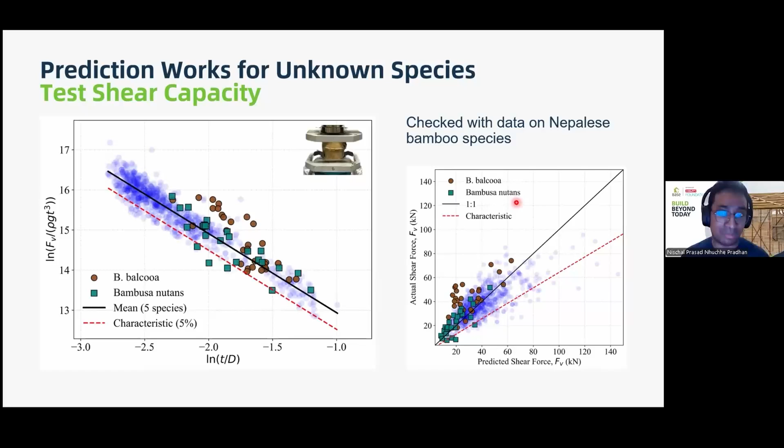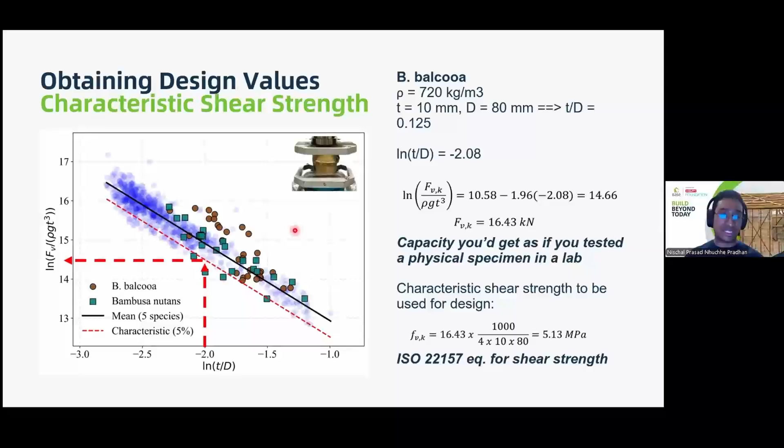So Kent, I knew you would ask that question. That's why I had these slides at the end. Let me see if we can find that again. So here, if you look carefully, you can see how the equations we developed for BIC work well for samples that were never tested in BIC. This sample, Bambusa balcooa and nutans, was tested entirely in Nepal in a different laboratory, different system, different climate, different region altogether, and you can see it works really well.

And then if you think Nepal is, because I live in Nepal, maybe I had some contribution, you can see data from Sri Lanka over here. So this is Dendrocalamus hookeri. Now this was completely independent, different researchers, different environment, different species altogether, and you can see it still works very well with this species. So we can continue doing this again and again, but I think the answer will be the same.

If you can see, if I answer your question. I think, Nischal, that's excellent, and I'm not questioning your data. I'm kind of making a point to the community here. Because you do have data from different sources, I think we can start establishing interlaboratory bias data. And this is critical because that's also part of establishing a good, solid standard, is understanding what that will be.

So let me interrupt and answer that. I totally agree with you, Kent. We are just completing the information about this process because we think it's an interesting approach, and it should be out there so more people can start to test it. And definitely we are totally open and preparing. Once the paper is released, immediately, and this is already agreed between Nischal and myself, we are going to open all the data for the RILEM group and for the construction task force also, so everyone can work with our data. So we are just waiting on this paper.

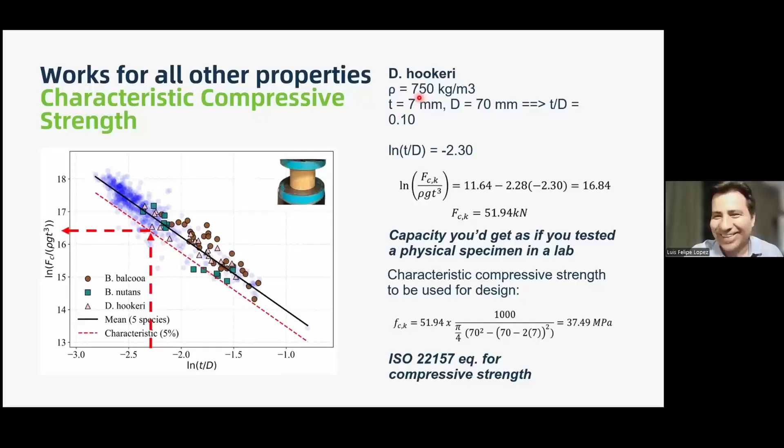Before we close, I have a question that I think will be interesting for a short talk. It was first posed by Masi and then by Kent, and I agree we should discuss for a couple of minutes the situation in Hong Kong with the fire of the scaffoldings on these three buildings, and the question of whether this is going to affect bamboo construction. Definitely it's going to be bad news in my opinion, and it's going to create a lot of concern about bamboo construction.

But we also have to understand that this is scaffolding, not a building. It was not a building made of bamboo that was burned. It was a scaffolding that has no fire protection and is totally flammable. So I don't know, Kent, do you want to say something about what you mentioned?

Yeah, I think this is a concern for the industry. Obviously whenever there's a tragedy—and it's too early to start talking about this from a structural perspective, regrettably there are still more lives to be lost—I think we need to recognize that what comes out in the media is not always particularly accurate. I've seen a lot of media, very good media, The Guardian, CNN, saying bamboo is burning and caused the fire spread, look at the images. But we have a burnt out building with the bamboo structure still in place.